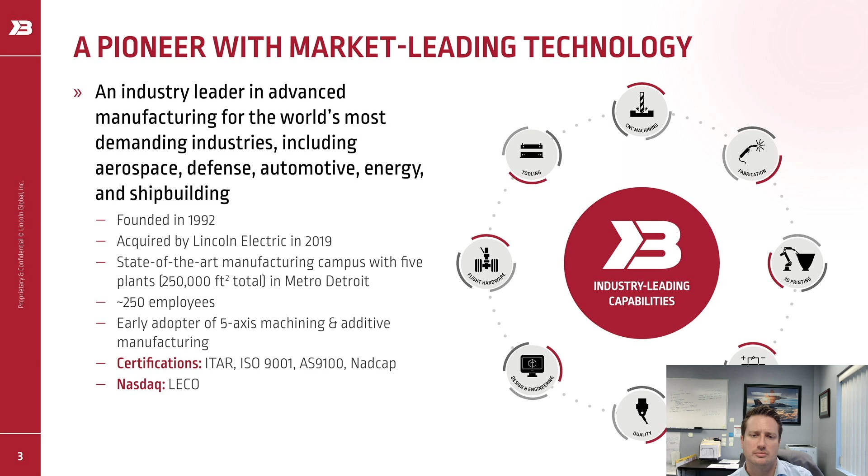So this is what we look like today as far as the Baker campus. The Lincoln stuff I mentioned before, they're a global company, locations all over the world. Specifically, the Additive is located in Cleveland, Ohio. But as far as the Baker campus, this is what we are: 5 buildings here in the Detroit, Michigan area, Macomb Township specifically, if you're familiar with the area. And we've grown over the years, adding.

We've had good luck with buildings being nearby. But just a quick overview: Plant One, that's all of our machining, so all of the CNC machines and anything I talk about machining related today, that's occurring there. And then Plant Two, that's all of our heavy fab, so all of our welding, saw cutting, bump forming, water jetting happens over there. And then Plant Three and Four, that's where we kind of split between tooling in Plant Four and components or parts in Plant Three.

So both of those plants will use machining and fab services from the other buildings, and then they'll do either focus on tooling like aerospace, fixtures, layup molds, assembly tooling, automotive, large vehicle bucks out of Plant Four. And then out of Plant Three is where we really focus on hardware like aerospace, flight hardware, a lot of machined components, and that's where we will do some machining, but we will also do final inspection. We'll do NDT and all the assembly, and we also are building shipboard products out of there for like the Navy and other shipbuilders. Plant Five out in the background, that's more of a standard product we build, Lincoln Electric cobots.

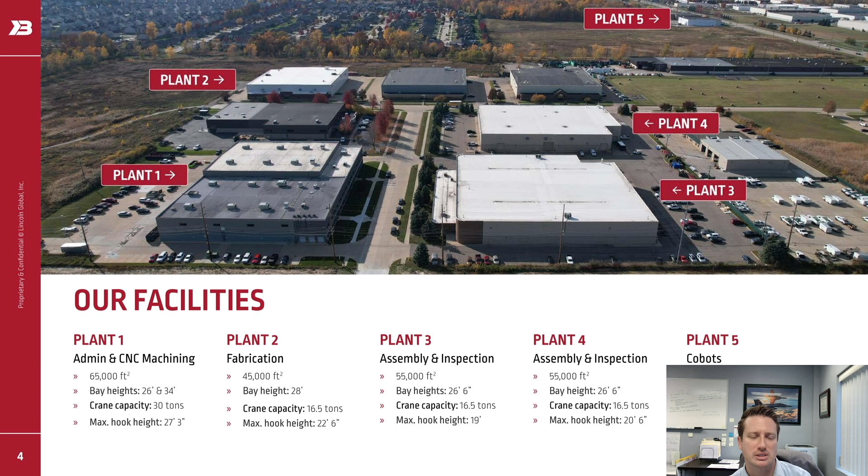Last slide or so specific to Baker before we jump into the general machining discussion, but wanted to make sure we share with you guys, why should you be listening to us? Where's our credibility? And what do we have to do with large machining? So we've got a ton of small machines and a good amount of medium ones, but we wanted to put up on the screen the largest machines that we have to show you what we can do.

That MECOF Powermill on the top left, we can do about 46 feet by 20 feet on that machine bed and 10 feet under the spindle. The EcoMill, we've got about 30 foot, and that's a horizontal. And then the bottom left, we've got 2 new power mills that are getting installed as we speak. They should be operational by the end of the year, and those we can do about 26 feet by 13 feet.

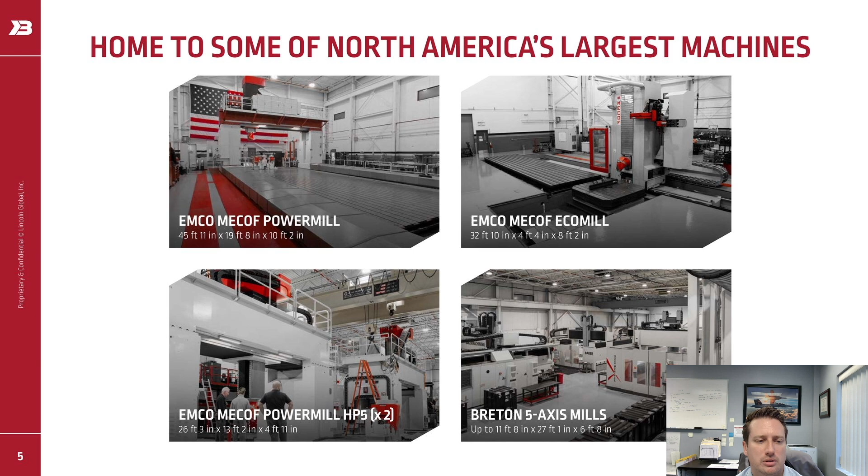And then to the bottom right, some Breton mills, wide range of stuff there, anywhere from kind of 10 feet to close to 30 feet. And those are some of our more legacy type equipment, where some of the power mills are new things that we're bringing on. But we've seen a lot of applications in some of the industries we'll talk about coming up. As you can see, adding 2 new power mills in 1 year, we're seeing a lot of growth, a lot of opportunity, and a lot of reinvestment from Lincoln back into all of our companies, but specifically here at Baker.

So a little bit more on the industries that we serve and that we see large scale machining really come into play. Aerospace and defense, that's our biggest one right off the bat. Typically, a lot of what we see on the really large side is tooling, so a lot of big layup tools and mill fixtures could be for like a wing or a fuselage. And then we also see where those would have a lot of complex, more of a single part, but complex shape and geometry to it.

And then we also see a lot of assembly tooling where maybe there's hundreds or even more components being built up into a large assembly tooling to help customers be able to hold their parts, put them in position. But a lot of times with that, there would be a main frame that comes with that assembly tool. So a lot of times we'll do welding of the frame, machining of that frame on one of our large machines, and then all of the assembly of the smaller details over in Plant 4.

Also in automotive is again where we see some large tooling, not so much the parts, but some of the large injection molds. We've machined a lot of those over the years, and then vehicle bucks or like dupes or duplicates of future model years. So those are often full size, full scale representations of vehicles and can be made up of several components, typically large pieces of aluminum for internal vehicle bucks, and then large steel frames for external.

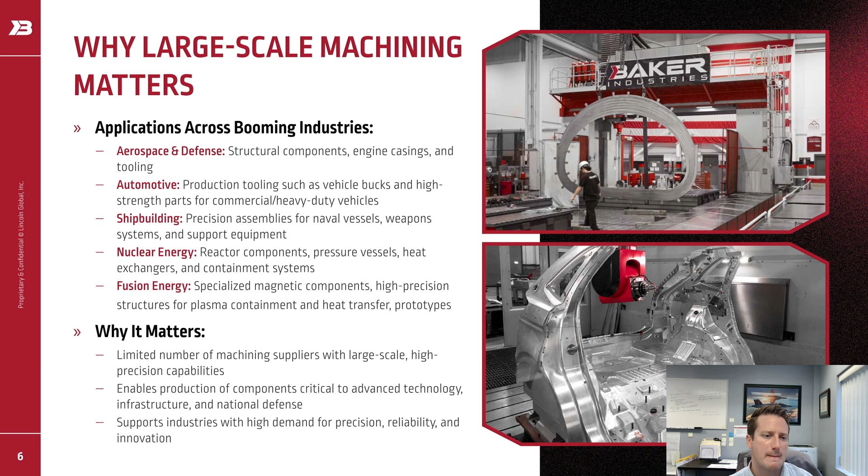So some of the challenges, or at least the ones we've encountered here, I wanted to talk about. I do have slides that get into these items a little further, but in general, the size and scale should be obvious - we're talking about large stuff, but there's a lot of day-to-day things that come with that, which we'll talk about in the next couple slides. Then precision - to maintain accuracy on the machine, the larger it gets, the more error there is physically, and then the harder it is to inspect from a quality standpoint.

And then workflow. Workflow is difficult when you're talking about really large, unique structures. There can be a lot of time in procuring materials, a lot of time in welding them up or designing them. And there's no room for error, no room for scrapping product when you're making something that might take weeks or months or even years to produce. So having a good workflow from the beginning is very important. A lot of times there's a lot of engagement with customers, and a lot of design changes happen along the way that we need to be flexible to support.

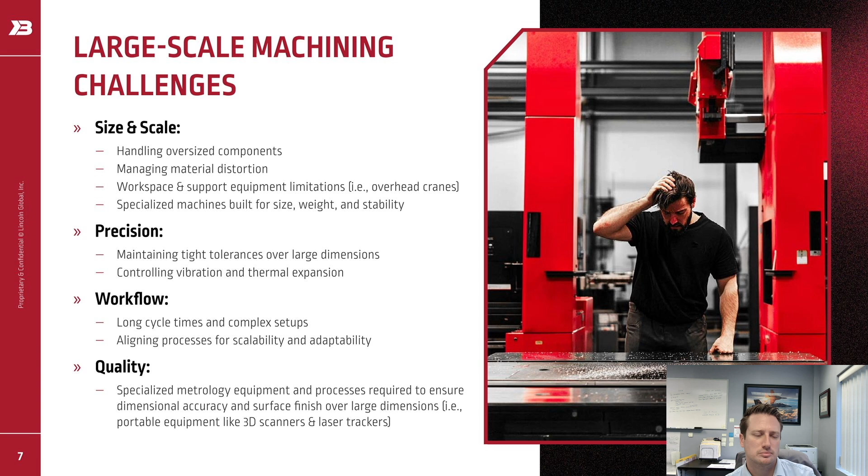Getting into those a little more - the obvious one we mentioned, part size and scale. Just maneuvering parts can be a challenge, and that's something we've noticed ourselves. We've had instances where we've needed to put in larger doors, larger cranes. There's a lot of times we have to build custom crates or tooling just to move components between our facilities. And then, of course, ultimately shipping to a customer can be difficult when we're talking about extra wide loads and weight considerations, frost laws, things like that. So we try to address a lot of that upfront with our customers, understanding that once we build this, there's the complexity of delivering, installing, and things like that.

Some of the solutions we've done in the past - a lot of stuff we produce that's smaller goes out in wood crates. But some of these things are so large or so heavy that we have to actually build custom aluminum and steel crates, either for over the road or for ship transport to the final customer.

On the pure machining side, having machines large enough is pretty obvious. But one thing we've noticed is having machine beds that are maybe even larger than your anticipated part size. A lot of times customers have programs that go on temporary hold, and setup on those jobs takes a lot of time. So having a machine where you can leave something set up and move on to machining a different part, then come back to it, is the kind of flexibility you need to be successful.

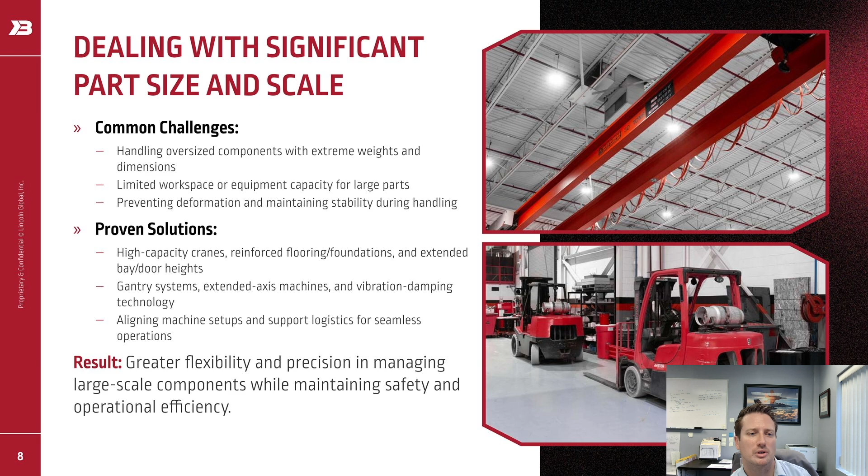On the quality control side, this is something that has a little more unique needs when we're talking about small and medium parts. A lot of times we can check those on a CMM, coordinate measuring machine. When we get into really large components or tools, typically we're going to use a portable solution, something like a laser tracker or a blue light scanner. And then you have additional challenges with the accuracy of those machines over greater and greater distances.

So engaging with the customer, making sure they understand the limitations of the equipment. A customer might be used to one thou or half a thou test accuracy ratio on a CMM. Maybe they need to be made more aware that we're talking about 3-4 thousandths on a laser tracker over a distance of 32 feet, or whatever your part might be. So a lot of that is educating and understanding our capabilities up front to make sure we set expectations with the customer on what we can do at the end of the day.

Another big part of having good quality is performing in-process inspection. When we're dealing with parts that may be one of one, it may never get made again, or a handful are going to be made this year and that's it—especially on the tooling side, or anything to do with high value material or long lead castings—we have to do in-process inspections throughout the machining process.

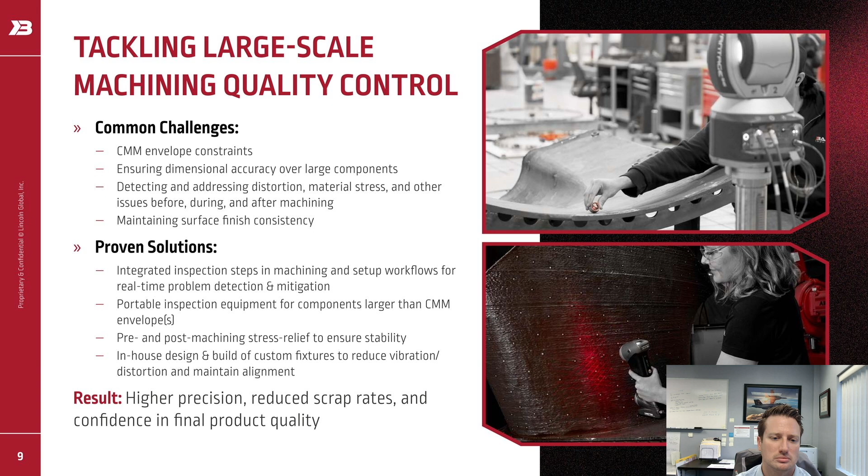So bottlenecks, right? This is definitely an issue when we talk about large scale machining, because there's not a ton of machines out there in the world. If we were to have an issue meeting customer timelines, there's not a lot of relief valves to go to. And there's also often with these large projects a lot of opportunity for changes, and programs get put on hold and then come back on hot when you have other things working through the shop. So the way we've addressed a lot of this is redundancy in our machines.

So we are at a spot now where we like to buy two when we're going to buy a new piece of equipment. Even if maybe our program is requiring one at the time, we see opportunity for growth and we see a need to have that backup. If one machine goes down, or volume increases, rate increases on something, or other work comes in, we want to have that ability to move to a different piece of equipment.

And then, like I mentioned, with machines, the maintenance side, potentially machines going down. Having our own in-house maintenance is huge for us. Obviously, new machines, we want to work with the manufacturer for any warranty they have there. But having somebody on site here that knows all of our equipment can speed that process up with the OEMs. And that person can take care of machines that are out of warranty, making sure we have preventative maintenance plans in place to eliminate downtime.

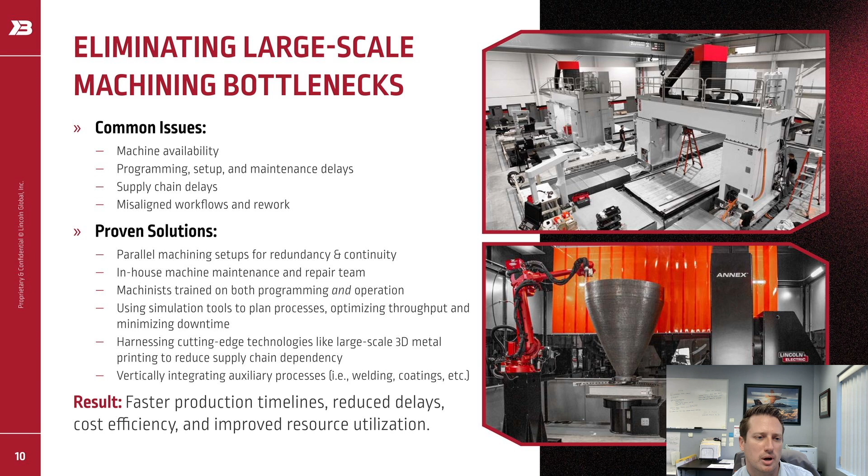So with that, I wanted to talk a little bit about some of the trends we are seeing on the large scale machining side. Definitely back to additive a little bit here, the sustainability. So material waste - we're seeing customers 3D printing parts on their own with some existing technologies. We're seeing customers come to us with problems and asking us to 3D print those to reduce material waste or reduce timing there.

And then a lot of material type. So probably 5, 10 years ago, almost the vast majority of what we were focused on was aluminum, steel, and Invar. Today, some of our business positioning has changed, but I think a lot of the market in general has changed to more super alloys, looking for more high performance, lighter weight. So we see a lot of titanium, a lot of Inconel, a lot of stainless steels, going into critical defense and energy applications. Just the material demands are increasing, and that's something that really on the tooling supply side you have to be aware of, and make sure you understand how to cut those materials. They're going to perform differently.

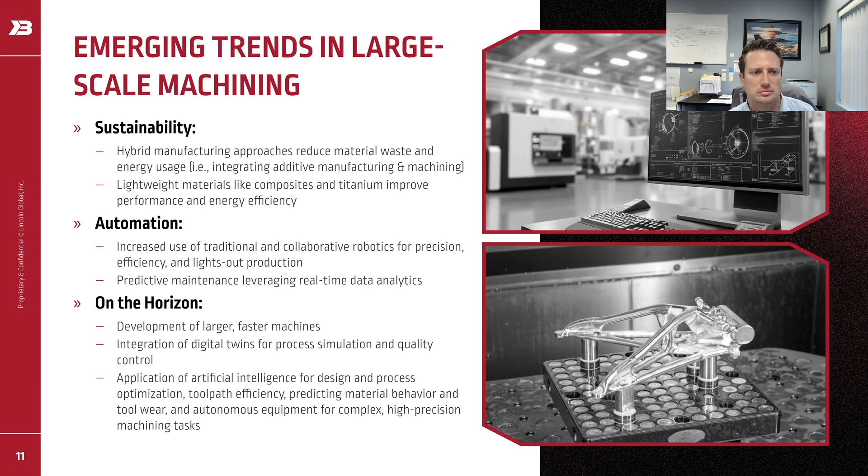So some takeaways for you. I talked a lot about redundancy with us. It's multiple machines. When we're talking about large scale machines, let's have multiple that we can go to within the company. There's always a need for that.

Automation, we talked a lot about, both on the machining side, what's coming, and then on the software side. Scalability, this is where we really want to focus on how do we make things faster and be able to do that efficiently in our process. So that's again leaning on software, but it's also growing just with machine count.

We've added 8 machines this year. Our additive business is continuing to grow. So being able to add into our existing facilities and kind of use our existing culture and management to continue to grow there. And then quality is a must.

So again, when you're dealing with industries like aerospace, automotive, energy, shipbuilding, quality is an absolute must. And not only is it a requirement from your customer, it's the right way to run a business for profit and for employee morale and safety and everything. So something we build in from the beginning, but really would encourage everybody to take quality, AS9100, ISO, NADCAP standards, and make those a big part of any quality management system that you have.

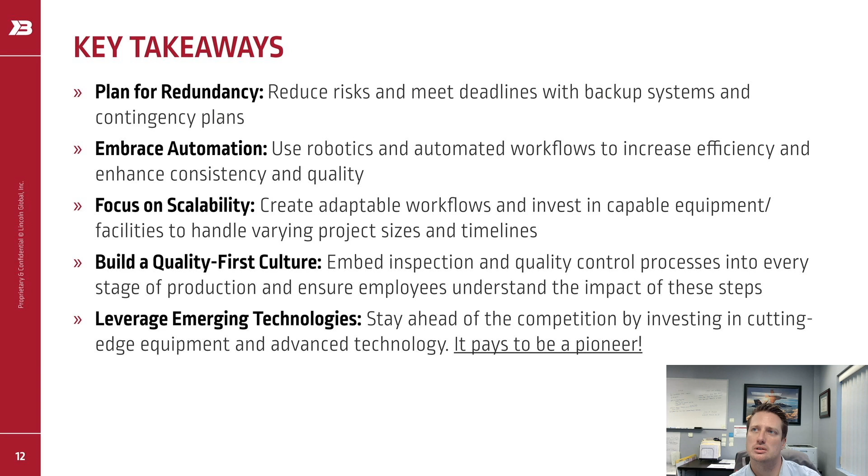So a lot of the machines that we looked at today, EMCO/MECOF machines, has been a great partner of ours.

On the control side, FANUC and more recently Heidenhain controls is where we've been focusing, trying to standardize around one or two. I think that's important — it gives a lot of ability for machinists to transfer between different assets. So if somebody's out, on vacation, sick, or whatever the case is, a lot of our guys are cross-trained and can jump over to that machine and keep it running.

On the tooling side, a lot of people probably know Kennametal and Polcom, but they've been great partners of ours. There's a lot of opportunity if you get to know those guys — they'll help you understand what tooling you need to be successful. They're also a great opportunity to get some R&D type capabilities with, so they can help provide cutters for you to do testing with, and provide information on studies, time studies, things like that.

FCS — I had that one picture of the NASA part. So, flexible clamping system, this is something we use as much as possible. It's a fast way to hold parts and integrate holding features into parts. Sometimes customers are okay with those features continuing on and staying with the part, in which case, if there's ever changes, it makes it very easy for us to get back into that component, set it up, and machine any changes in. Sometimes it's not an application where they can leave those fixturing holes in. In those cases, we take that into consideration and either wouldn't use FCS, or would use it just in a roughing stage and machine away those features before we get to the final product.

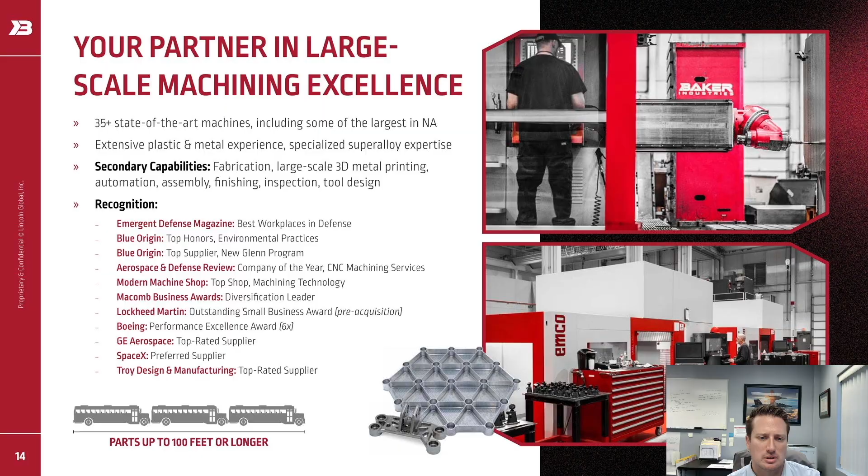Yeah, so with that, that's what we have. I don't know if there's any questions there, Tim.

Doesn't look like any questions came in during the live recording, but we did have some questions come in ahead of time, which would be really cool if we could go through those. Sure, so I'll read you those and feel free to answer.

Can you elaborate on how hybrid manufacturing is integrated into your workflows and what benefits it provides for large scale projects? I know you definitely touched on that. Yeah, touched on it a little bit, but I can spend a little more time on it.

For us, we really want to focus on that word hybrid manufacturing. We don't look at anything like, hey, it has to be additive. We look at, alright, is there maybe an entire piece of this, or maybe even just small parts of a tool? A lot of times aerospace tools, there might be a large flat section and then a portion with some complex geometry. Let's look at just printing that complex geometry, welding it to the more flat plate, and that gives us an opportunity to really drive down timing and cost without saying additive is the solution for everything.

And then there's certainly applications for just full replacement of long lead castings and forgings that might take months or longer to get, that we can print in weeks.